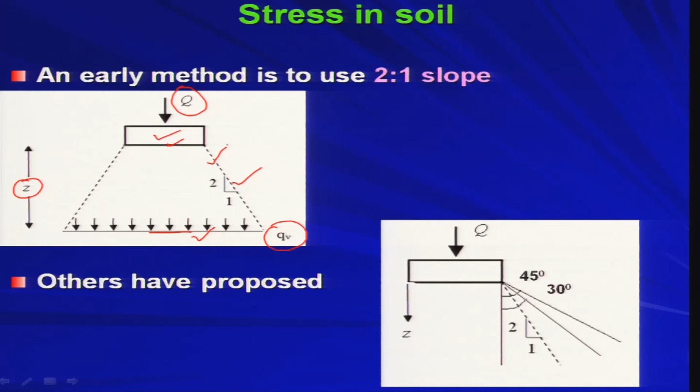Now, others have proposed that instead of a 2:1 slope, this dispersion line could make a 45 degree angle with the vertical, or 30 degree with the vertical. So instead of a 2:1 slope, your slope is different, defined by this angle, either 30 degrees or 45 degrees with the vertical.

The idea remains the same: the total stress, small qv, at the base of the loaded area, will be capital Q divided by the area at that level. That remains the same; only the dispersion is different. People say the dispersion could be 2:1, or 30 degree dispersion, or 45 degree dispersion. Whatever the case, you can find the stress developed at any depth z below the ground surface by qv, small qv.

Now, this pressure increase is an increase in pressure, because the soil already has some stress. As you go deeper, at any level the soil has a vertical stress equal to gamma into z, which is already there. So there is no addition or alteration in that part. If you consider any soil deposit at any depth below the ground surface, you will get the vertical stress equal to gamma into z.

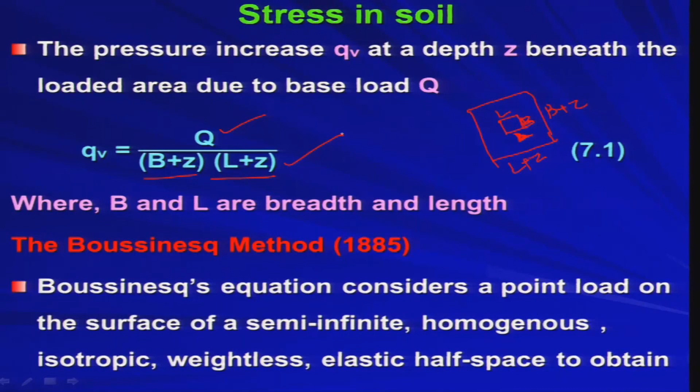This expression means that if you want to find out the pressure increase at any depth z below the surface where the point load is acting, you can find it from that expression. Let us see how that expression looks like.

Along the Z direction you are going to the deeper strata of the soil. Now for that Q, if you want to find the pressure increase at any point, defined by two coordinates, small r and small z—knowing r and z, I can find the pressure increase just below the point load when r equals 0, or if some r is present, I can also find the stress.

So basically you need r and z to locate a point at which you want to find the pressure increase, and that pressure increase qv is given by the expression: 3Q divided by 2 pi z squared, times 1 divided by (1 plus (r/z) squared) raised to the power 5/2.

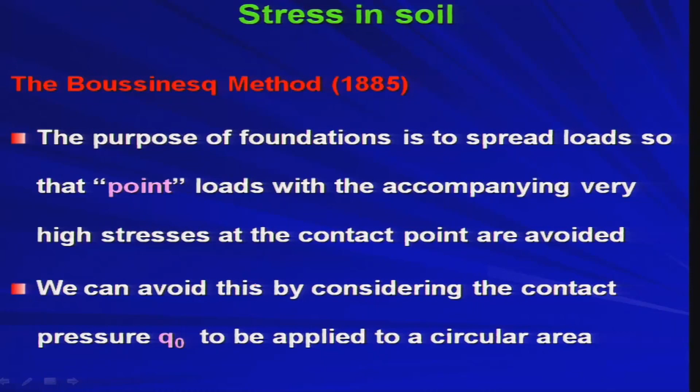We can avoid this by considering - instead of putting the concentrated load, I know what the pressure increase is, but generally we avoid that kind of situation by putting the foundation. Once we put the foundation, we do not have any concentrated load giving high stress concentration at the contact point. To avoid that situation, we put the foundation, and we can avoid this by considering the contact pressure Q naught to be applied to a circular area. So capital Q, which was the concentrated load earlier, is now uniformly distributed over a circular area with some stress intensity equal to Q naught. That means capital Q divided by the circular area is nothing but Q naught.

So if we have that, then the pressure increase at any location below the circular loaded area will be obtained by expression 7.3, where Q naught is the uniformly distributed load intensity over the circular area, R is the radius of the circle, and Z is the depth at which you want to find the stress. If you know R and Z, you can find out the pressure increase below the circular loaded area. This was also proposed by Boussinesq in 1885. All these methods are based on theory of elasticity. I am not talking about the complicated calculations or analysis of how to obtain this - please remember, these equations are not empirical, they can be derived based on theory of elasticity.

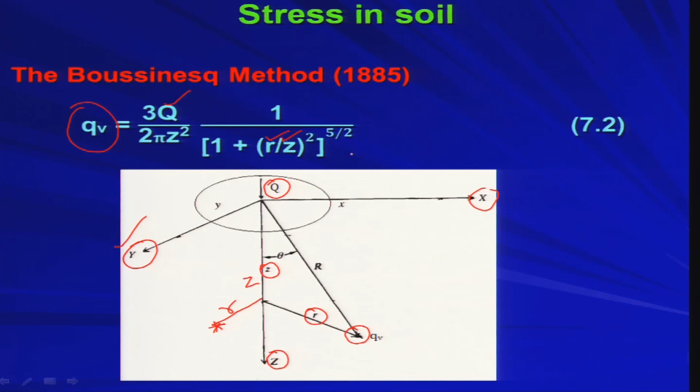So y axis means, if you see here, y axis is here. So parallel to y axis, if you have the line load, that means along the y axis it is almost infinite. So if we consider a vertical line load Q kilonewton per meter, of infinite length oriented parallel to the y axis, then we get the pressure increase at any depth Z, equal to 2 into Z cube into Q divided by pi into x square plus Z square to the power 2, the whole square, where x and Z are the distances along x axis and along z axis.

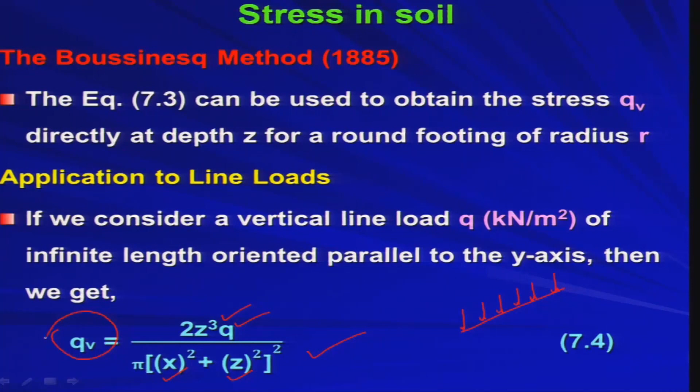So if you have the line load along say y axis, at any distance x and at any depth z, you can find out the pressure increase by this expression. So if you know q, and you know the location, that means x and z, you can find out QV ultimately. This is the pressure increase happening in the soil at some depth z due to the line load.

Now, if you have the square or rectangular loaded area, instead of circular, what will happen? Boussinesq has proposed equations for that also, applicable to square or rectangular bases, and round ones too. Of course the circular one can be considered, provided it is converted to equivalent squares. So if you have the circular area you can convert that to some equivalent square, and you know how to find out the equivalent square.

So if this is R, the total area of the circular base will be equal to the area of the square base. Based on that you can find out the side length of that particular square. So it is applicable to square or rectangular bases, and if you have the circular base, you can convert that to the equivalent square base.

Now, as per Newmark in 1935, stress beneath the corner of an area B into L - please remember, it will give you the stress at any corner of the square or rectangular base. This will give me the pressure increase. Please try to understand, it will not give me the pressure increase at any location within the square, rather it will give me the stress below the corner of the rectangular or square base.

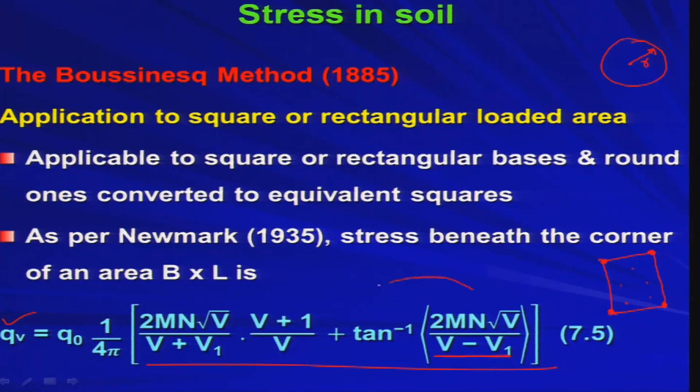Now, when V1 is greater than V, the tan inverse term is coming negative. So if you look at this expression, if V1 is greater than V, this tan inverse term will be becoming negative. So in that situation, what we do is, if V1 is greater than V, the tan inverse term is negative and it is necessary to add pi, to get the principal value. So we consider pi minus that.

So in general, equation 7.5 can be written as QV equal to Q naught into I sigma, where I sigma is the stress influence value as given in table 7.1. So we will see that.

How? M is nothing but B by Z and N is L by Z. So if you know B and L, and which location you want to find out, that means at what depth you want to find the pressure increase, that is if you know Z, you will be knowing the magnitude of M and N. Once you know M and N, you can find out I sigma from this table.

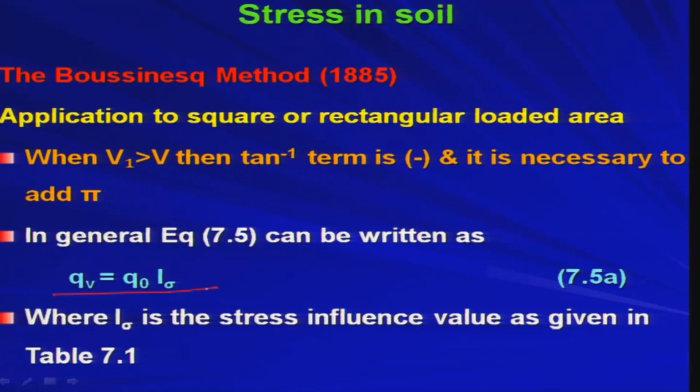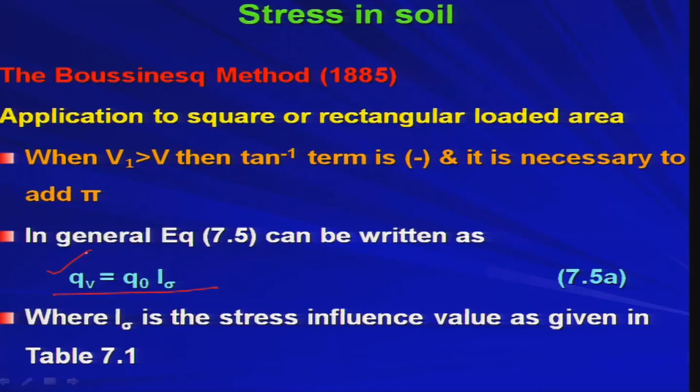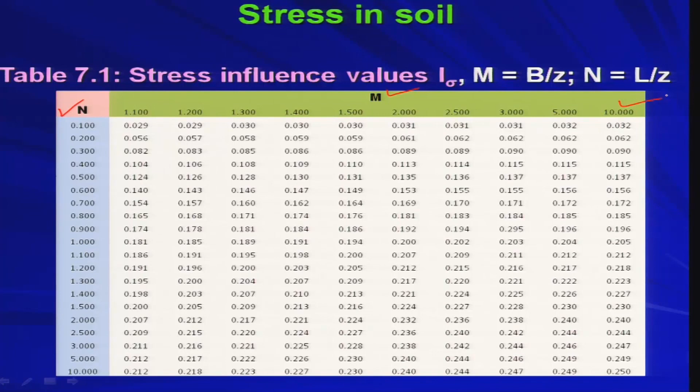So now we are coming to another method, that is the Westergaard method.

When the soil mass consists of layered strata of fine and coarse materials, as beneath a road pavement, or alternating layers of clay and sand, Westergaard equations give a better estimate of the stress QV. Now what does this mean? If you consider a layered strata, the Boussinesq theory considers a homogeneous soil medium, which should be homogeneous, isotropic, semi-infinite, weightless, all those things should be there, then only you get the Boussinesq solution.

Now if the soil is layered strata, which is very common, you will not be getting a very homogeneous kind of strata. If the soil has layers, just like in a road pavement, you have the base course, sub base course, wearing course, all these layers laid down one by one. So at any depth, suppose due to vehicle movement, if you want to find out the stress increase at the base course or sub base course.

Then the Westergaard method will be pretty applicable or suitable. This gives a better estimate for QV than the Boussinesq solution, because Boussinesq considers homogeneous strata, whereas Westergaard is good for layered strata.

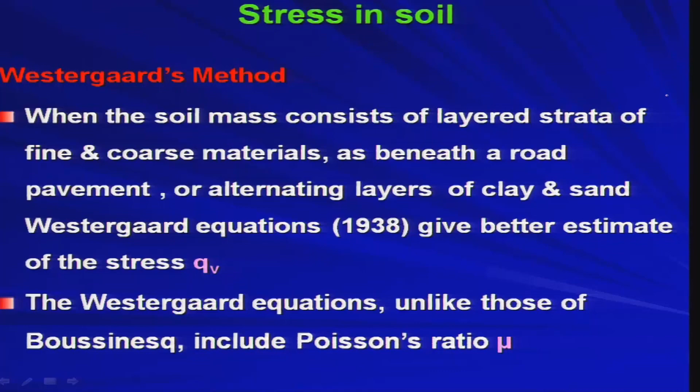The Westergaard equations, unlike those of Boussinesq, include Poisson's ratio. That is the biggest advantage of the Westergaard method. It considers Poisson's ratio mu, meaning you are considering the lateral strain, because due to vertical application of stress you get some lateral contraction or expansion. That can be taken care of by the Westergaard method. That is the basic difference between Westergaard and Boussinesq method.

Now as per Westergaard, for a point load Q, the QV, that is the pressure increase, can be obtained by this expression, where small a is nothing but 1 minus 2 mu by 2 minus 2 mu, where mu is the Poisson's ratio. This diagram will be pretty similar to what we have seen for the Boussinesq method. If you know R and Z, you can find out QV provided you know the Poisson ratio of the soil. That is the advantageous thing, so layer-wise you can calculate it.

As per Westergaard, under circular loading area, we try to map whatever we have learned for Boussinesq. So, under the circular loading area, delta sigma z is equal to Q naught into 1 minus root over A by (A plus R by Z square), where A is the same as whatever we have seen in the previous expression, 1 minus 2 mu by 2 minus 2 mu.

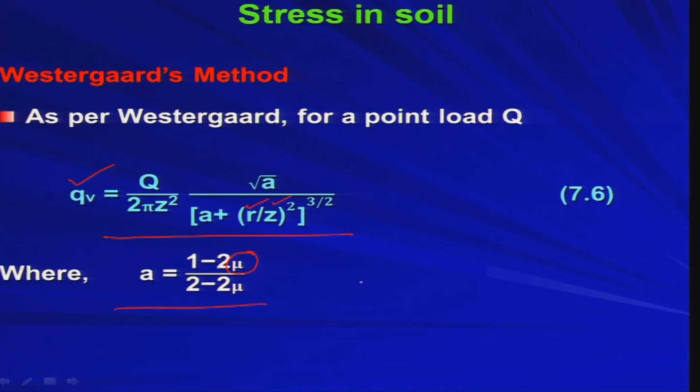Now, M and N can be found out in a very similar way. What is M and N? M is B by Z and N is L by Z. Those remain as it is, only the tan inverse will be in radian. So, if you know the M and N value, you can find out this delta sigma z.

This is all about stress in soil. So, as you have seen, how you can calculate the stresses, pressure increase at different levels and locations below the ground surface due to additional load on top of the soil, now we will take some numerical examples on retaining structure for earth pressure theory, that is the lateral pressure, and also numerical examples on stress in soil. With this, the whole subject of geology and soil mechanics is concluded.

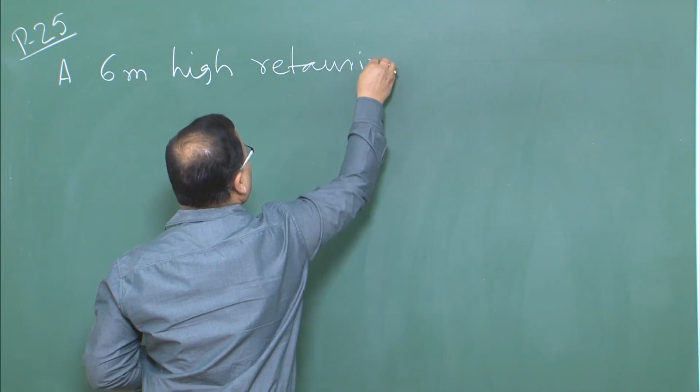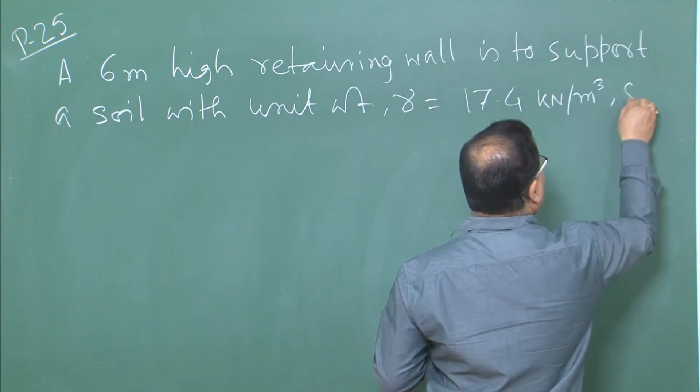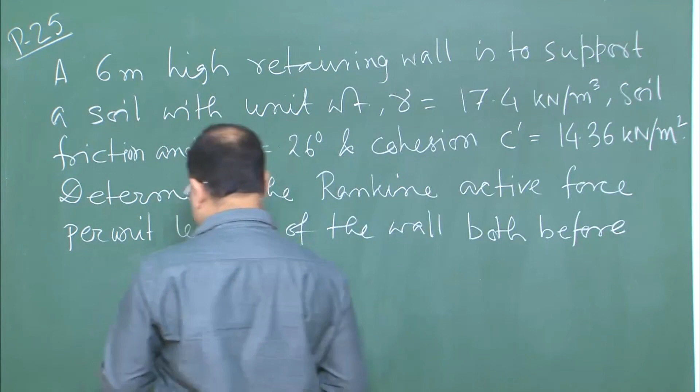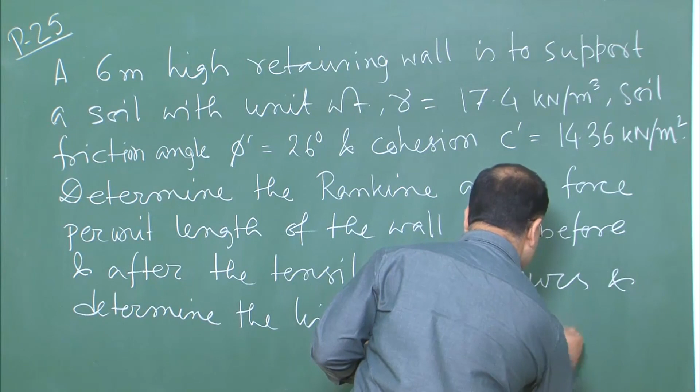The problem says a 6 meter high retaining wall is to support a soil with unit weight gamma equal to 17.4 kilonewton per meter cube, soil friction angle phi prime equal to 26 degree, and cohesion C prime equal to 14.36 kilonewton per meter square. Determine the Rankine active force per unit length of the wall both before and after the tensile crack occurs, and determine the line of action of the resultant after the tension crack develops.

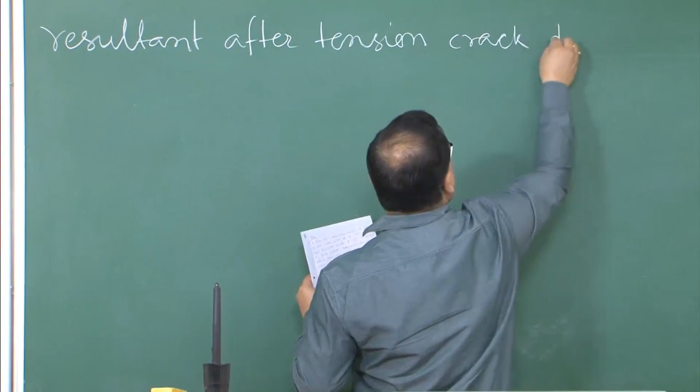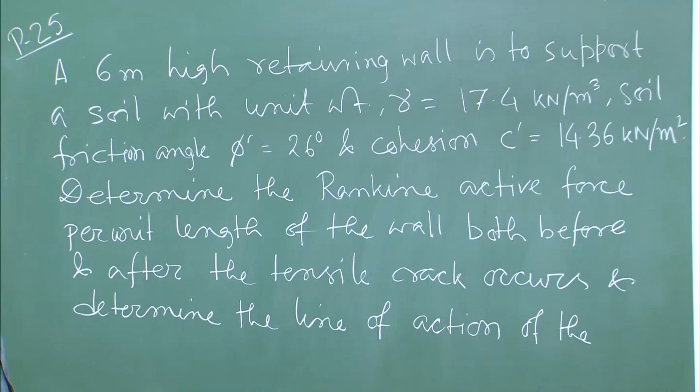So this is the problem. A 6 meter high retaining wall is to support a soil with unit weight gamma equal to 17.4 kilonewton per meter cube, soil friction angle phi prime equal to 26 degree, and cohesion C prime equal to 14.36 kilonewton per meter square. These are all effective parameters. Determine the Rankine active force per unit length of the wall both before and after the tensile crack occurs.

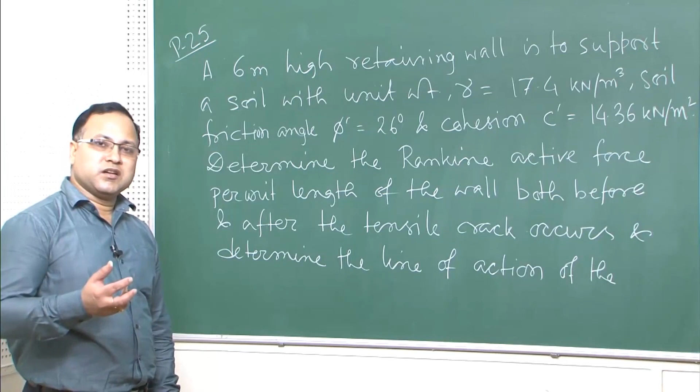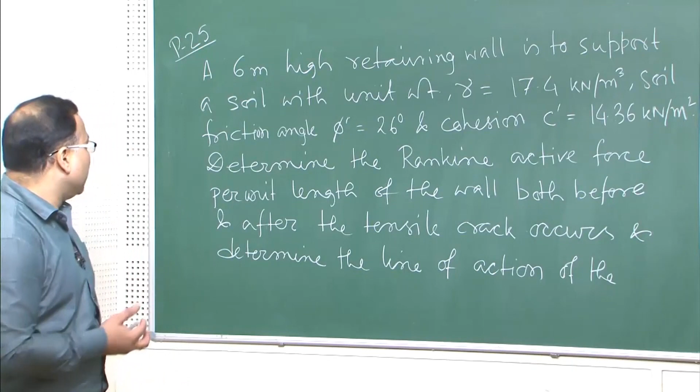That means, from the theory, in case of c-phi soil, that is cohesive soil, if you want to find out the active pressure, you will get some tension developed at the top part of the wall, and due to the tension you may get the tensile crack. So you need to find out the active pressure before and after the tensile crack occurs, and determine the line of action of the resultant after the tension crack develops.

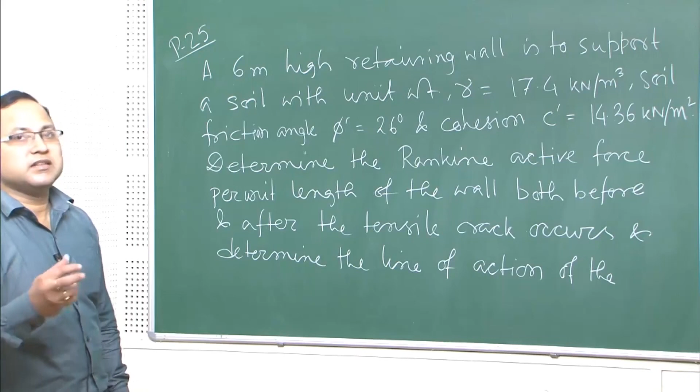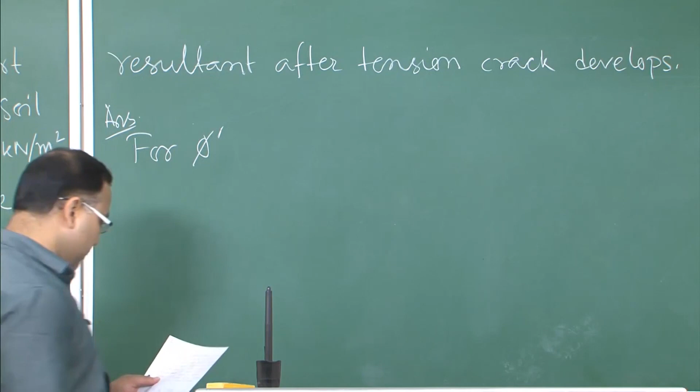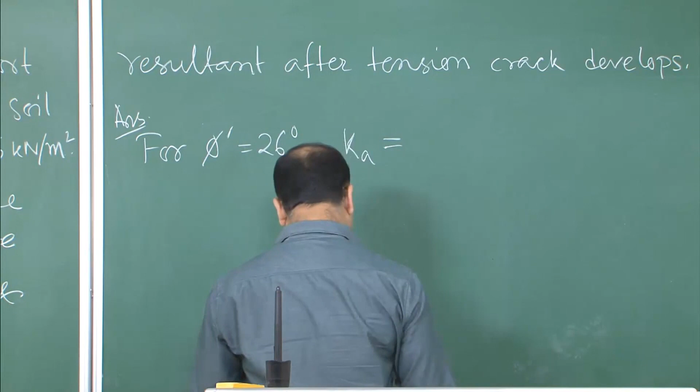So for the first part, our job will be to calculate the active earth pressure coefficient. Phi prime is equal to 26 degree. For phi prime equal to 26 degree, the active earth pressure coefficient Ka is 1 minus sin phi prime by 1 plus sin phi prime, which gives 0.39, and root over Ka is 0.625. These values will be required later on, and we have got them at the initial stage.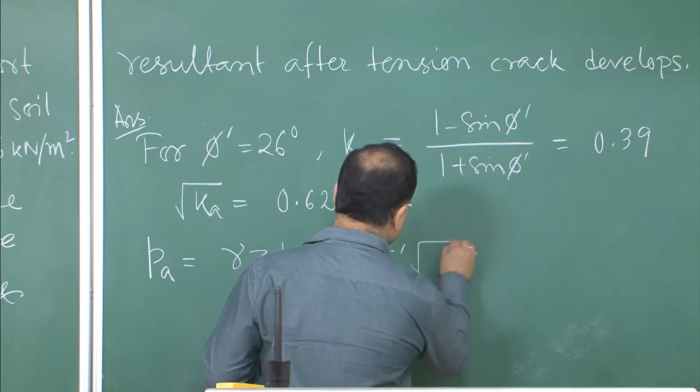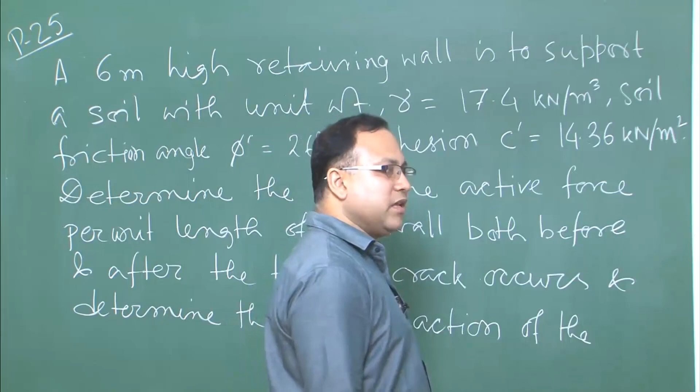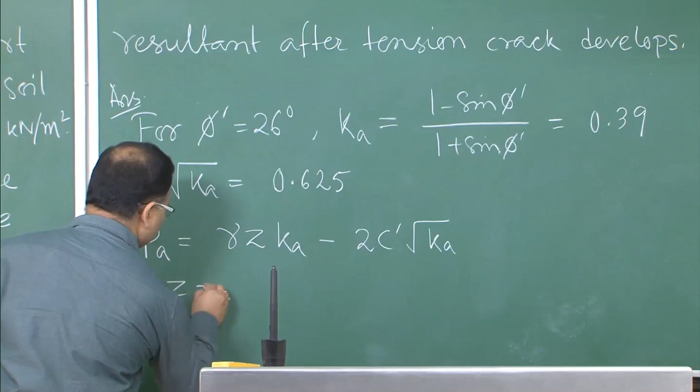Now, active earth pressure Pa in case of cohesive soil is given by gamma z into Ka minus 2 C prime into root over Ka. If you do not remember, please recall whatever we covered about the active earth pressure distribution for cohesive soil. Now, at z equal to 0, what is Pa prime? That means the effective earth pressure Pa prime is equal to minus 2 C prime into root over Ka, which gives minus 17.95 kilonewton per meter square.

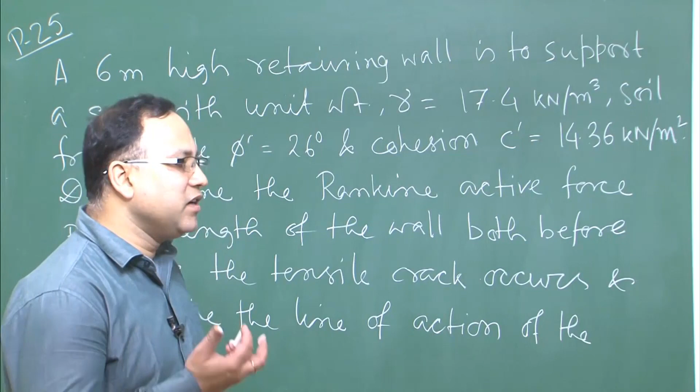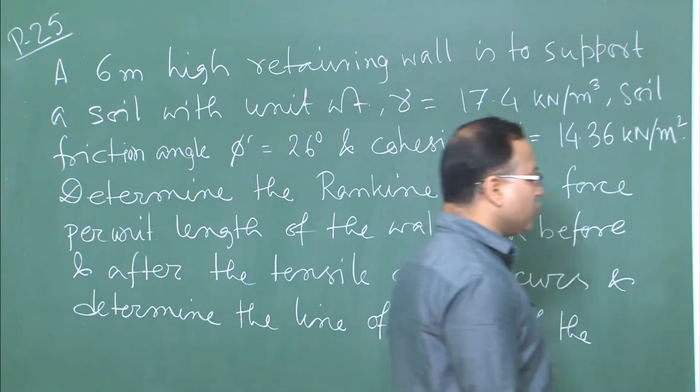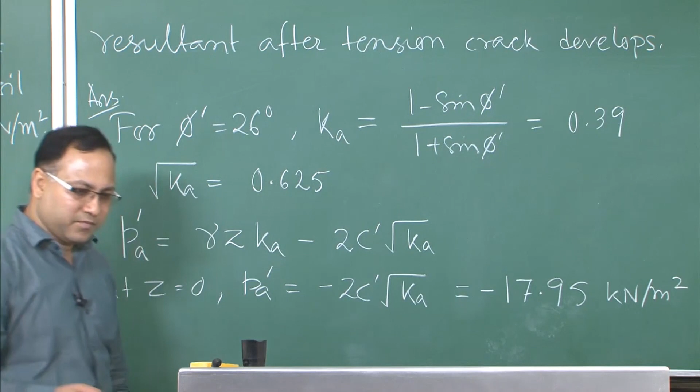So, 17.95 kilonewton per meter square. That negative sign is coming due to the tension developed at the top of the wall, which is pretty obvious. In case of active pressure, we have already seen that you get tension developed at the top of the wall. So, at z equal to 0, that means at top of the wall, you get active earth pressure Pa prime equal to minus 17.95 kilonewton per meter square tension.

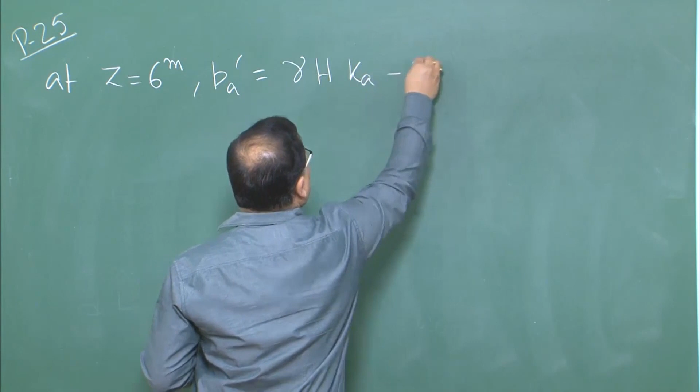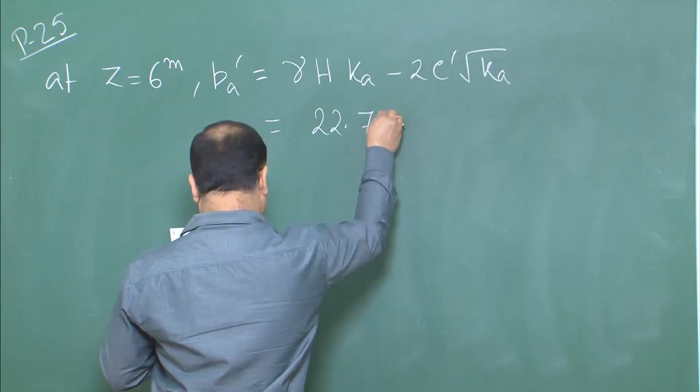Now, at z equal to 6 meter, that means at the bottom of the wall, what will be the active earth pressure? Pa prime is equal to gamma into h, the total height of the wall, into Ka, minus 2C prime into root over Ka. If I put all the values, I get 22.77 kilonewton per meter square. So, that is at the bottom of the wall.

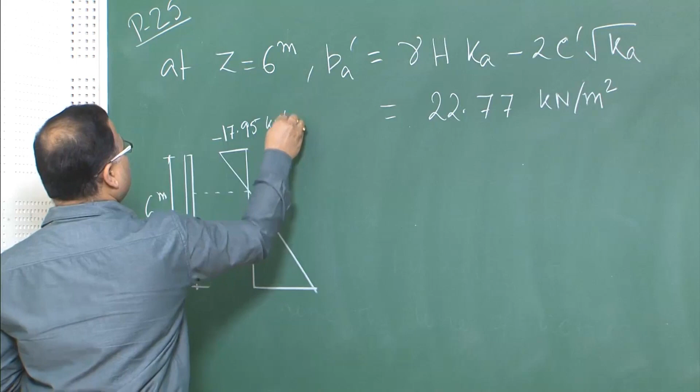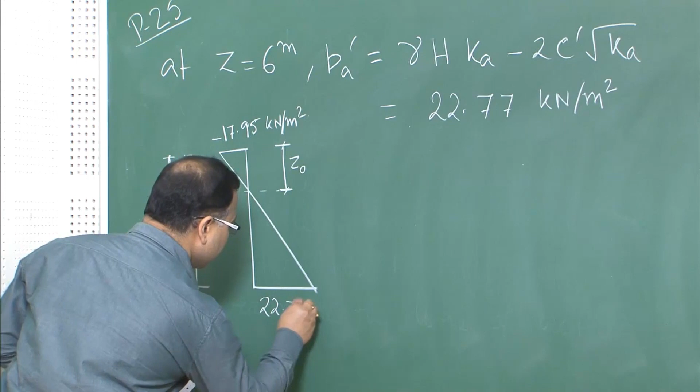So, if I have the wall like this, this is 6 meter, you get the pressure distribution like this. This is minus 17.95 kilonewton per meter square. What is this depth? This depth is nothing but Z naught, if you recall, and this is your 22.77 kilonewton per meter square.

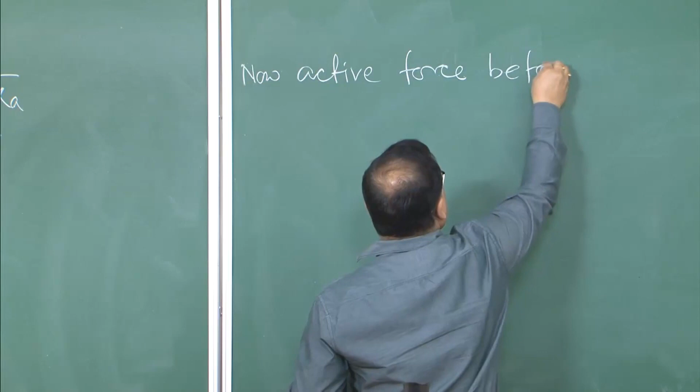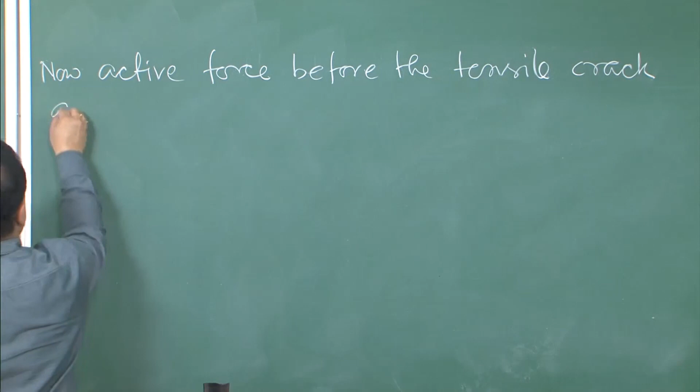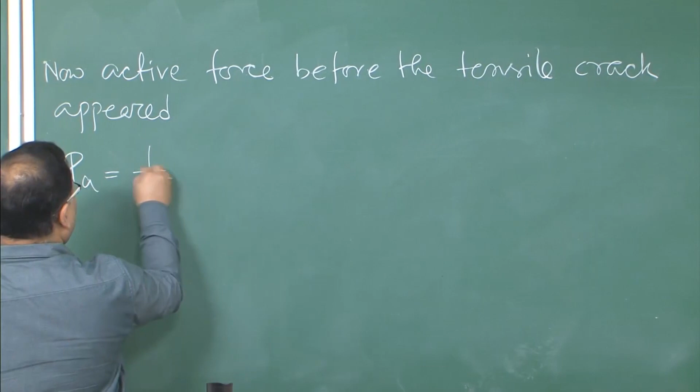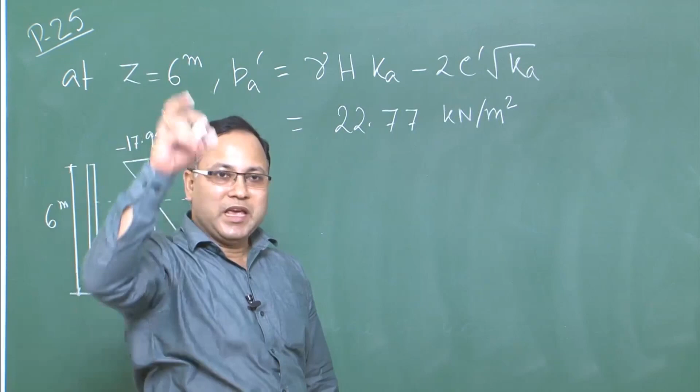Now, active force before the tensile crack appeared will be how much? Pa is equal to half gamma H square into Ka minus 2C prime H into root over Ka, that means integral from 0 to H of Pa prime into dz. So, in that way basically you can find out capital Pa, that is the total active thrust, the active force before the tensile crack appeared.

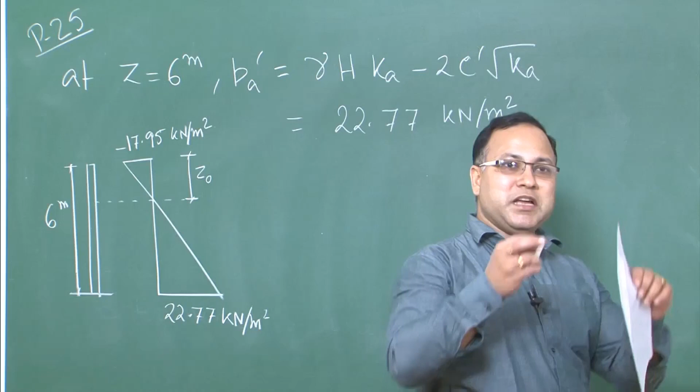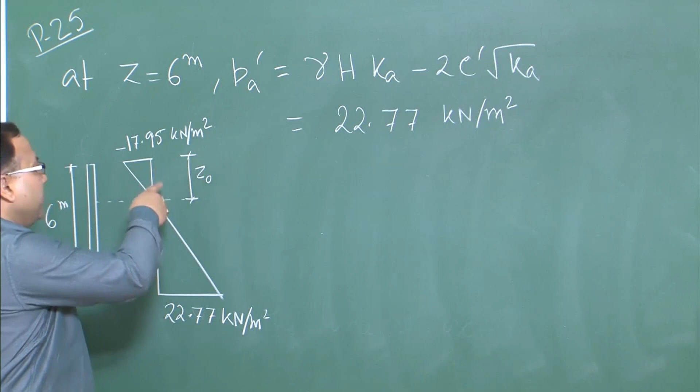Once the tensile crack appeared, then we have to consider only the bottom part of the pressure distribution, because once tension crack is developed, that tension is not considered, as we have already seen.

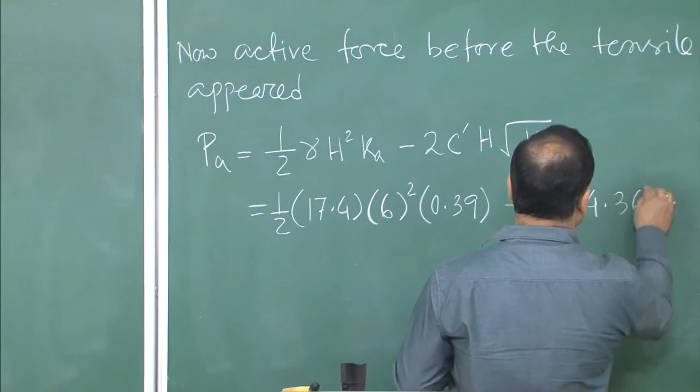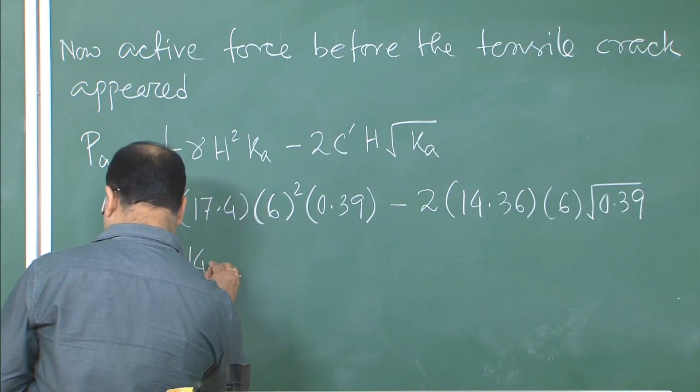So, if you put the values: half into 17.4 into 6 square into 0.39, minus 2 into 14.36 into 6 into root over 0.39. From this I get 14.46 kilonewton per meter. So, this is the first part of the problem, the active force before the tensile crack occurs.

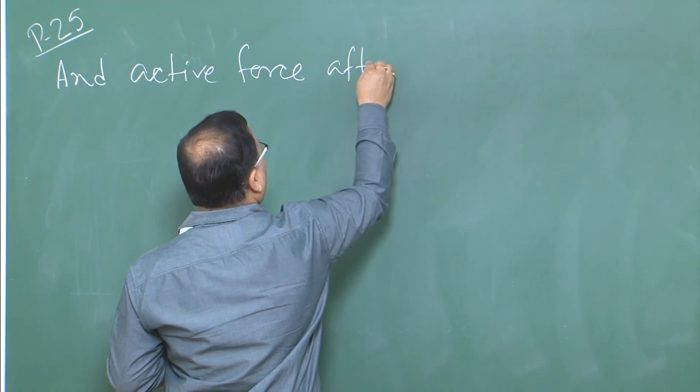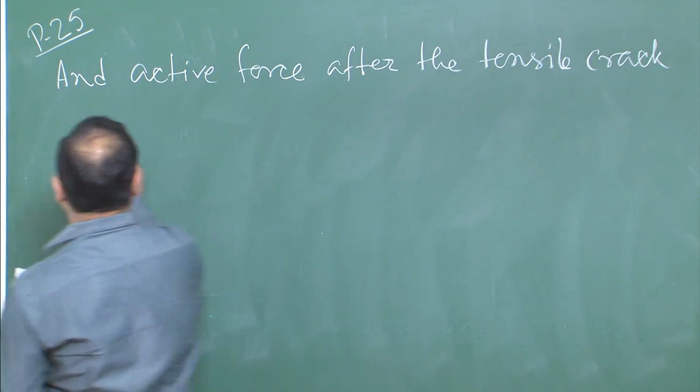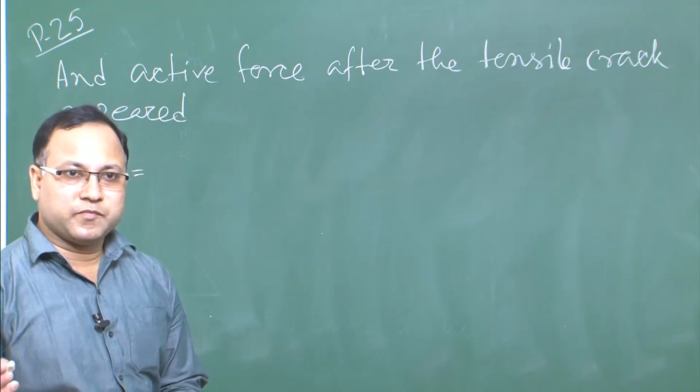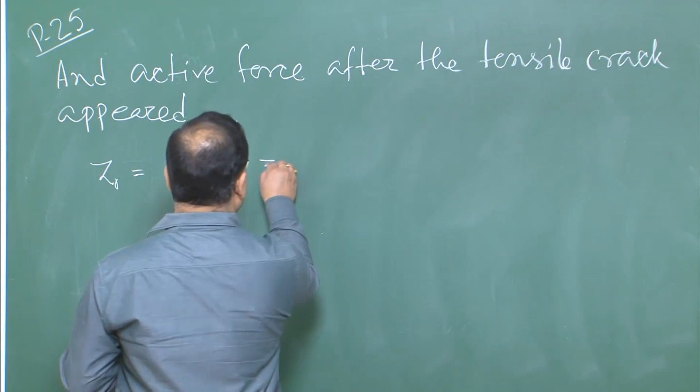And active force after the tensile crack appeared will be how much? For that, first you need to calculate Z naught, to see what portion will be left out. Z naught is to be calculated. From our previous discussion, Z naught is equal to 2C by gamma root over K. By putting all the values I get 2.64 meter.

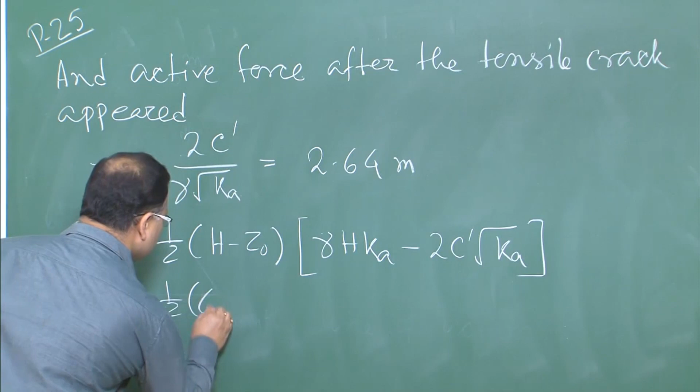So, therefore your Pa, the total force, is equal to half into H minus Z naught. I hope you remember this expression, refer to your class notes. So from here I can write: 6 minus 2.64, gamma 17.4, H is 6, into 0.39 minus 2 into 14.36 into root over 0.39. From this I get 38.25 kilonewton per meter.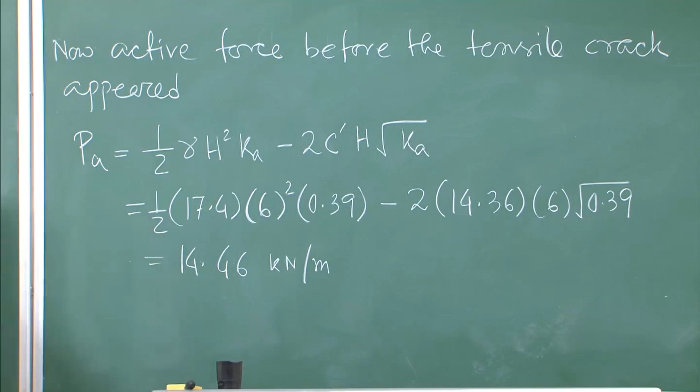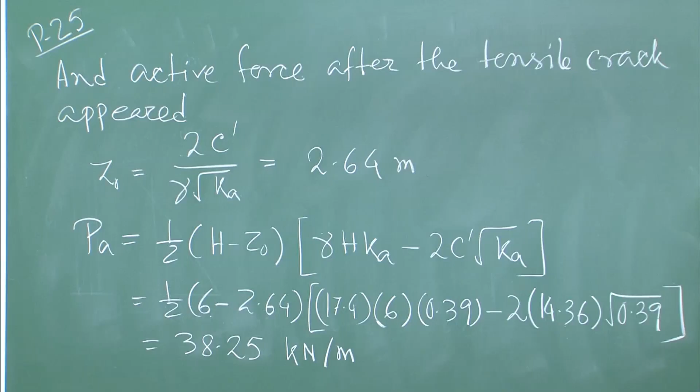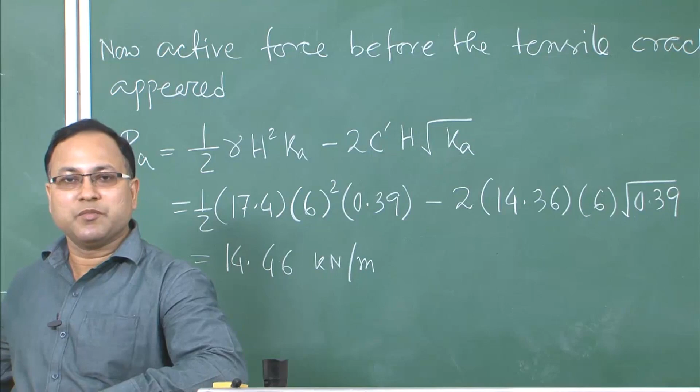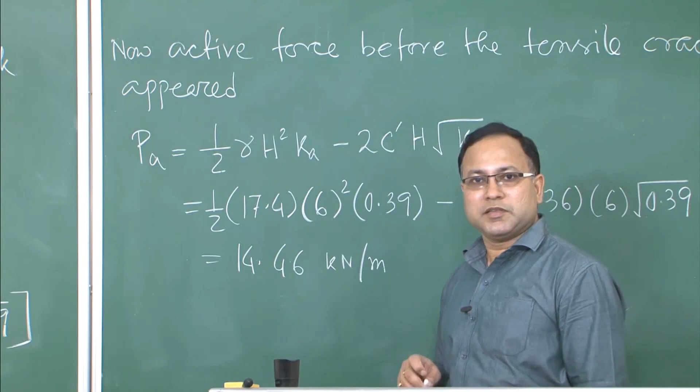Now you just compare. Before the tension crack happens, you get this much thrust on the wall, 14.46. After the tension crack happens, the total thrust on the wall is 38.25. Why has it increased? Because due to the tension crack you are neglecting the tension of the top part, up to Z naught. So, from Z equal to Z naught to Z equal to H, whatever pressure distribution is there, that total compressive pressure now comes into the picture. Earlier, when the tension crack did not appear, the tension from 0 to Z naught and the compression were nullifying each other. So, whatever was left out, that was the net force. That is why you get an increase or enhancement in the active pressure on the wall after the tension crack happens.

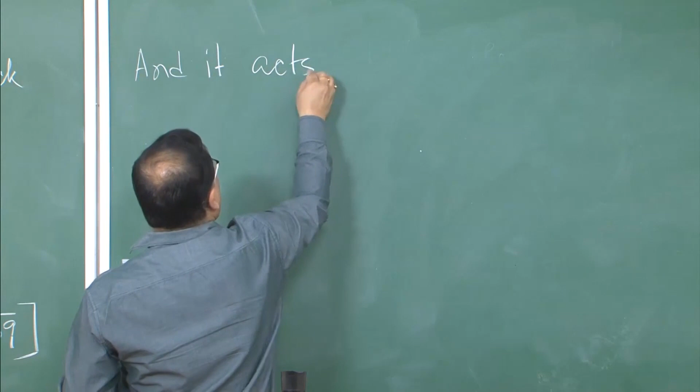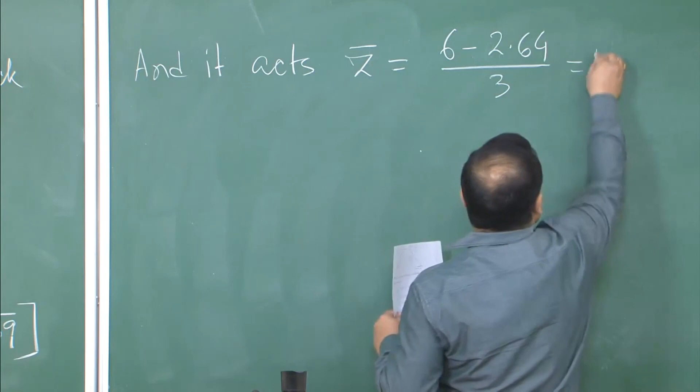And it acts at Z bar, which is nothing but 6 minus 2.64 divided by 3, so H minus Z naught by 3. At that location, the point of application of this Pa will be H minus Z naught by 3, which is equal to 1.12 meter from the bottom.